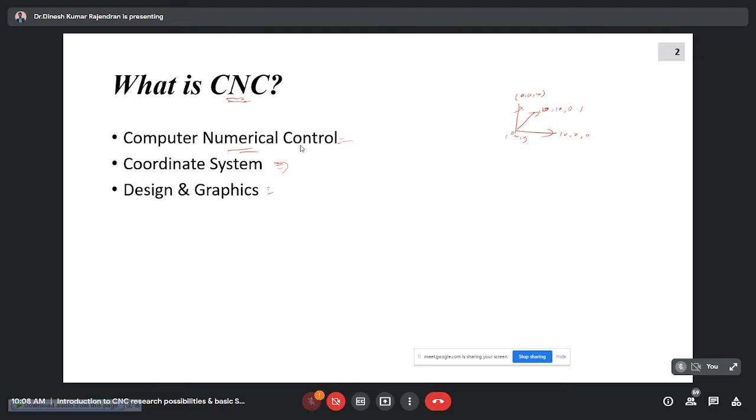So starting with this, I'll start with the basic machining, like whatever we have. The afternoon session, those who are attending, you might be knowing some of the few coding processes, how to utilize the machine, how to check with the process, that would be given. But what are the machines we have?

This is all about the machining center, like except surface finishing or surface roughness - surface finishing you can do n number of processes. Either it is going to be cutting, either it is going to be drilling, or it is going to be probing, or it is going to be milling. Whatever the process, it can be done completely with this particular thing.

And apart from this particular machine, what will be the output from that particular session is what are the other research possibilities using CNC, like computer numerical. If you are knowing basic programming in CNC, where you can apply it, what are the themes you can apply it for, that we'll be discussing in this.

So of course you have plenty of opportunity in machining. Of course when you come to forming, and when you come to welding, of course you have. When you come to additive manufacturing, of course you have lot, because everything is controlled by the coordinate system. And other possibilities, what are the other possibilities which is completely controlled by your computer implementer. If you know what is the coordinate system and what is the coding which is being used, you can control the entire thing with this CNC basic machining operation.

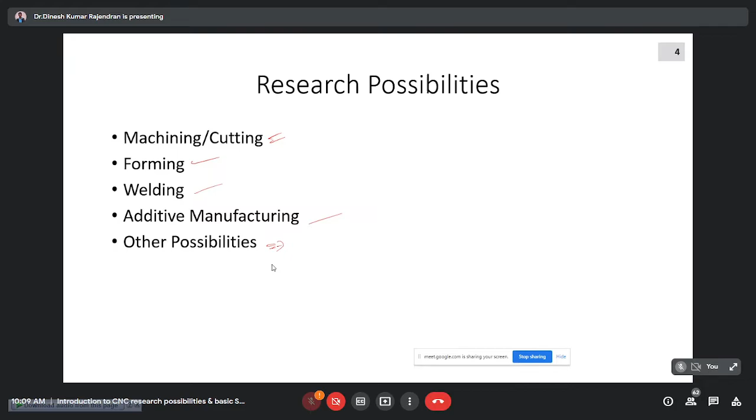That's what we'll be - some noise is coming in the background, right? So machining or cutting.

First, of course, we start with turning. So when we take basic turning operation, you have a shaft or something which can be done, so that can go for a facing operation, that can go for a turning operation. And what is the research possibility in this?

Now micro machining has evolved into a serious process, micro machining of intricate shapes. So whatever you do, as Noor sir was handling some session in yesterday's session, he was speaking about micro machining, completely removal of small chips. It is like removal of layer by layer in the micro level. So that has a wide scope right now in the field of turning when you go for micro machining.

So when you go for surgical equipments, it is mostly used in surgical equipments.

When you go for surgical equipment manufacturing, micro machining or micro turning plays a vital role in getting your product output done, and that area is a huge market because every surgical instrument or equipment has a sophisticated structure with micron-level accuracy. The cost of making that can go into thousands or even lakhs. So for those components, what you are going to learn in this CNC turning operation is going to have a vital impact.

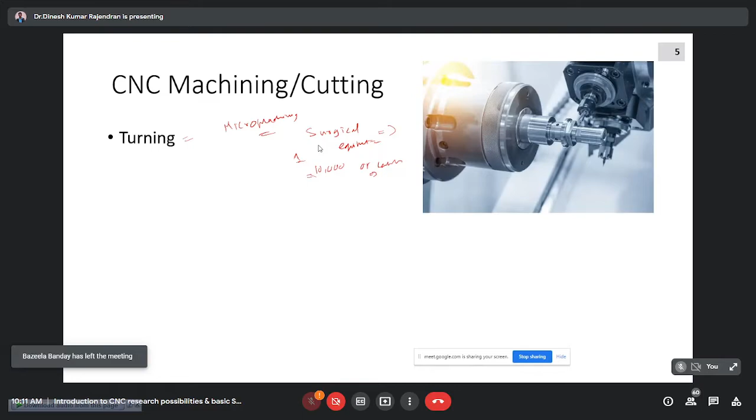So when you consider the entrepreneurial activity from this, apart from research, what are the things you can manufacture? If you know just the turning process, you can very well make something like this, or intricate shapes where the structure is completely allied, like what you have in wooden carvings, something like that. Everything can be done with this process.

So mostly when you go for the turning process, micro machining plays a vital role. Then comes the milling process. When you come to the basic milling process in CNC, the most intricate structure that will be tried by every expert in this machining center is making a bevel here. So they will have a structure like this.

Making these intricate shapes gives you complete clarity on milling operation, and once you know the exact milling operation, there is a lot of possibility in research where you always go for surface finishing of machine components, or you always go for manufacturing engine designs. Whatever engine design we have in aerospace, everything right now is completely milled and fabricated.

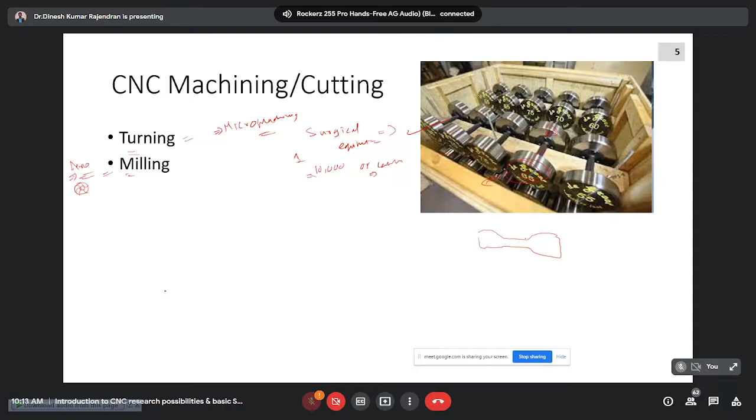You don't go for any welding or additive manufacturing, it's not even installed yet, they are still in research. So when you want to try out something on aerospace design, your milling knowledge, like the coding design based on your milling knowledge, is going to help you in those processes.

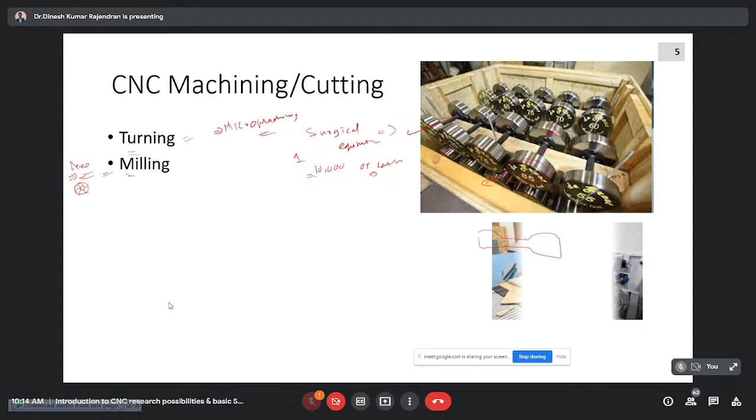So apart from that, the entrepreneurship thing you can try out with this is wood carving. What wood carving is happening is everything based on the milling operation, where you can see something on doors. Earlier carving was completely done by hand. Now it is completely based on CNC milling operation, where landscape generation is the beautiful task done with your milling operation.

Suppose you have some landscape where you have intricate mountains or something, these things can be completely done with this milling operation in a micro level way. When you go for the first layer of material removal, then you go for the micro tips, with that you create the intricate shapes of the landscape whichever is available.

And this is right now a hot topic of commercialization in the Valley, because when we met the director of MSME last week, he gave us a project on how to make the landscape of the valley, which can be sold out to the entire country or the globe. So in that case, this milling operation, when you have adequate knowledge in this, is going to have a better business opportunity in landscape manufacturing or the wood carving industry.

And what is going to be the research output of this? If you know milling and something on aerospace, the most vital thing in the milling operation is you can go for die designing. What are the die designs you go for in this area? This has a vital scope where a hardened material has to be designed, and that basic profile is completely manufactured by the milling process.

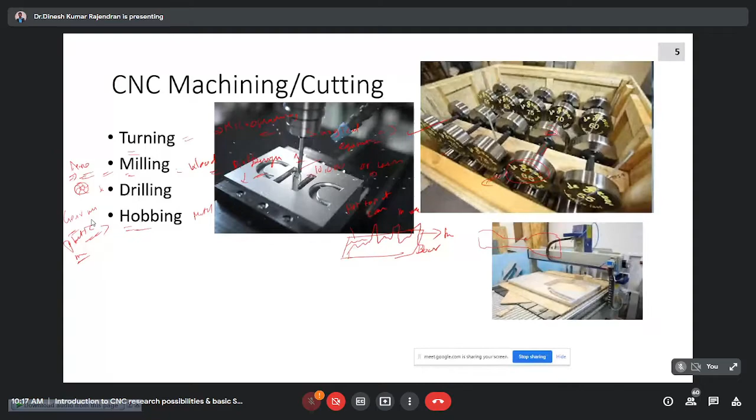If you know something about basic simulation, basic programming on CNC, how to go for a gear hobbing module - now we'll move on directly from machining to cutting.

Here it comes with different modules in laser cutting as well, where you have intricate profiles. What profiles you are getting engraved or carved is completely done with laser cutting. And what is the research possibility with this? Now sophisticated micro manufacturing needs a product maintained at an accuracy level of maybe around 5 to 10 microns.

Getting this product through machining is going to cost you thousands or lakhs. But when you go for laser cutting, the same operation can be easily done for a few thousand. So that is the major advantage when you go with laser cutting.

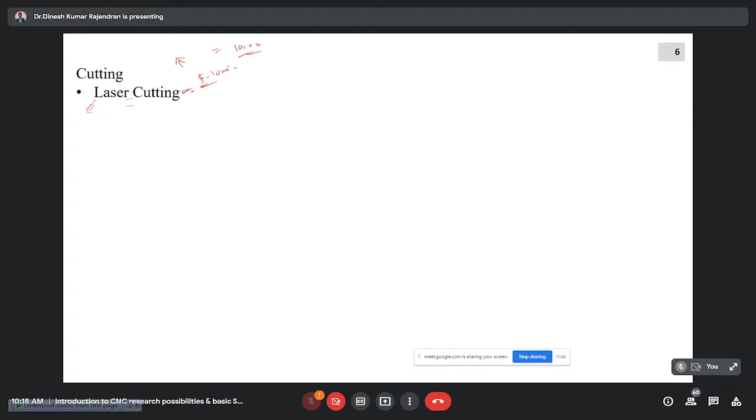And when you go for entrepreneurship activity with laser cutting, you have very good designs - this is completely made by laser cutting. They spark the laser at each and every point of the system and take the coordinates. This is completely 2D, and even 3D is possible with this. When you learn this CNC programming, the output can be this laser cutting or designing, which has huge scope in the market when you go for aesthetics.

Now you could imagine the engraving items, the embedded items you find in the market, or the shields or prizes you receive that are engraved or embossed on a shield - everything is based on laser cutting. So this technology has huge demand in the market.

I know a guy who started this business with just around 12 to 13 lakhs of investment, and he was an ME graduate from a reputed college. He got involved in this process and was doing some project with it. Then he started ideating with the process and collecting data. He started constructing his own machine and started a startup for shield printing.

Whatever shape you give - either our college logo or your name has to be embedded - everything can be completely laser cut, and you will get it. If it is going to be in metal, you have to go for laser to get a better profile, or in glass you also have to go for laser.

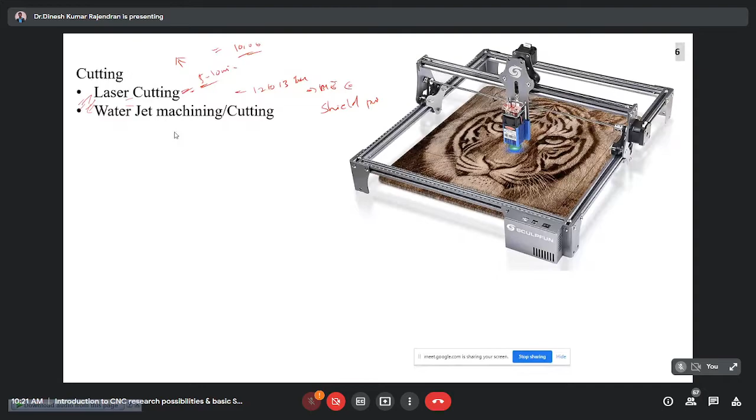Then comes water jet machining or cutting. Of course you would have read something about this in non-traditional machining processes, but what is the actual application? When you have some brittle material, ceramics, or composite that has to be machined, you cannot go for milling or laser cutting, which will not give you the proper output. In that condition, water jet machining, which uses abrasive slurry based on the profile structure, surface finish, or intricate structure, lets you play with the abrasive slurries. If it's in micro level, you get a better surface finish. If it's in macro level, maybe 100 microns rather than 5 or 10 microns, the profile is going to be quite higher. So there's a lot of scope in this cutting operation.

Then comes EDM. Again, wire EDM process or EDM process profiles intricate shapes just by moving, which trends with CNC milling operations, CNC simulators, where you create the profile, and then the machine will touch, spark it and move on, continuously sparking over it. The electrical energy is converted into heat energy, creating an intricate profile, completely based on your basic CNC control, because the backend coding will be completely on CNC.

Without CNC programming you can... yeah.

Right, thank you. So all this intricate structure manufactured even in EDM goes on with your CNC process. Everything is controlled with just the basic coordinate system, or maybe around 10 to 20 G codes and M codes that you always keep in mind to understand these processes. EDM now is almost like a well-developed technology, but there are still many researchers working on electrical discharge machining or wire cut EDM technology that creates intricate profiles. For a sharp sheet or plate where you cannot directly go for machining, you can go for wire EDM process directly. That has to be understood with knowledge of the medium, because only then will you understand the design being applied and the coding being applied. These intricate structures are manufactured by wire EDM, where you cut and take a precise form not feasible with milling or gear hobbing process, because these are microstructures where you cannot have any other shape with such intricacy. In that condition, EDM technology becomes a replacement for micro machining processes.

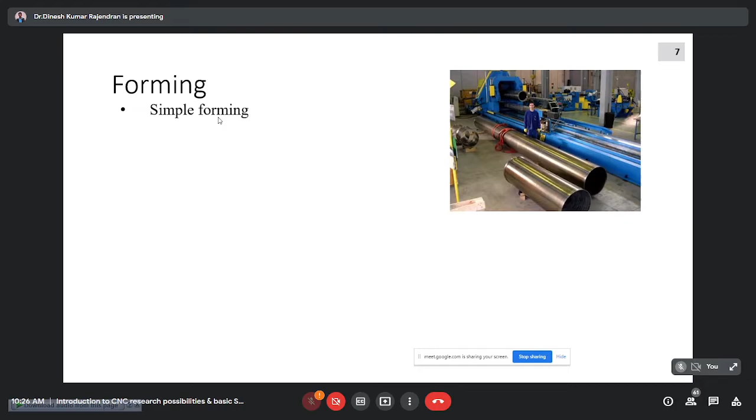In that condition, you have to go for an intricate shape of forming. The problem with forming small tubules is when it's for human implants, like something that has to be sent through your blood vessel. Those components are very minimal, very small in structure. That micro level has to be formed precisely. So this simple forming operation has a huge scope in surgeries or medical devices, where each and every intricate forming has to be done. This is mostly used in that particular sequence.

Then it is going to be incremental sheet metal forming. So next session will be completely on this. He'll be explaining a complete set of what is incremental sheet metal forming, and what is the advantage of this incremental sheet metal forming.

How this CNC is used is, when you have a sheet, it forms layer by layer. It pushes, and a gradual pressure is applied to get the intricate shape, so that you don't have any impact of load that creates a crack, or any excessive forming in a particular area that weakens it.

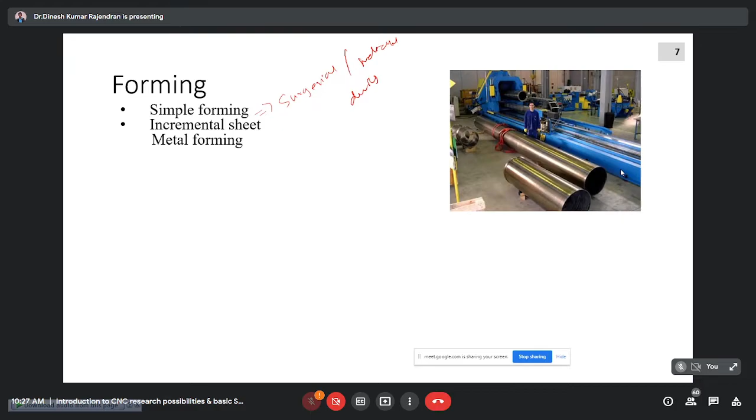So what is the major advantage of this incremental sheet metal forming or simple forming? As you see here, the intricate shapes are completely formed. When you go for normal forming, the problem is with the edges - due to the maximum force applied, the maximum strain and stress created makes these joints very weak. In that condition, to get the complete module to be perfect, you go for incremental sheet metal forming.

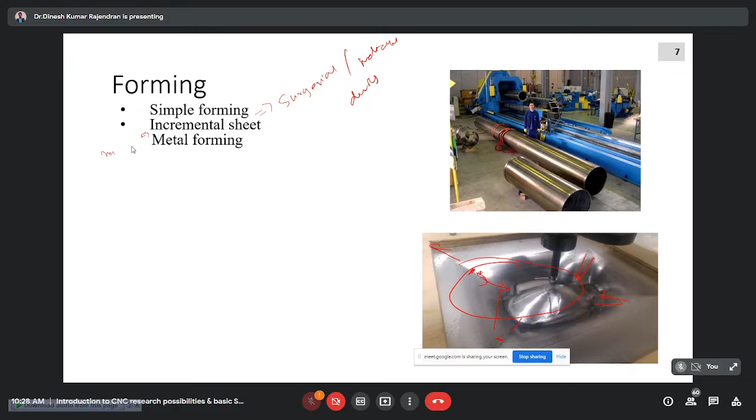This incremental sheet metal forming has a wide scope of research, where people are still working to get it right, because the complexity increases with this. There is a lot of research going on this particular incremental sheet metal forming, which you will see in the next session. So here are some examples of this sheet metal forming, showing how it actually works.

You have a normal space, and with this sheet metal forming, you create the entire profile of your body. That's how this is generated. So again, this has a wide scope of research.

Then the final thing in forming will be completely on superplastic forming. Have you ever heard about superplastic forming? Superplastic forming is the one which gives you a 100 times increase in area, 1 to 100 times. Incremental sheet metal forming can give an area stretch of around 10 to 20, maybe around 40 times. But superplastic forming gives you an intricate shape that can be around 100 times. So the surface area, without any defect or loss in strength, can be stretched to 100 times.

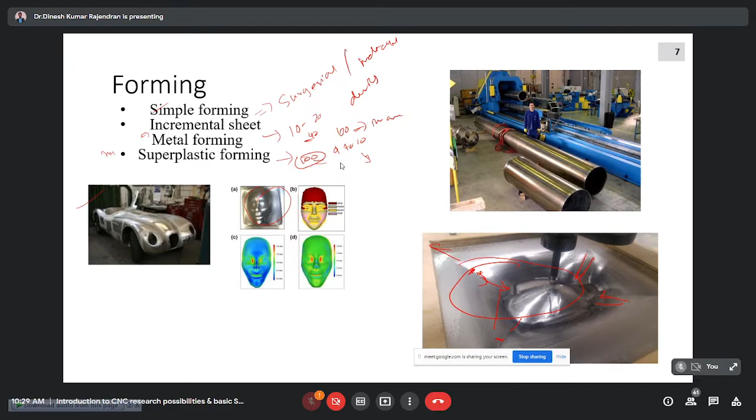Maybe like 1 centimeter can be stretched into 100 centimeters without having any loss in strength. This is mostly used in aerospace, because they need light material while maintaining strength. In superplastic forming, things get stretched to an intricate state where the complete structure is stretched with the same level, the same uniform thickness, into a complete shape where the strength is maintained throughout the process. This gives a wide scope, and it's still in research.

You cannot find too many research works in superplastic forming because we don't have that much facility in most places, but still a few NITs and IITs have superplastic forming technology where this is completely a research topic. There is very little entrepreneurship activity in this area.

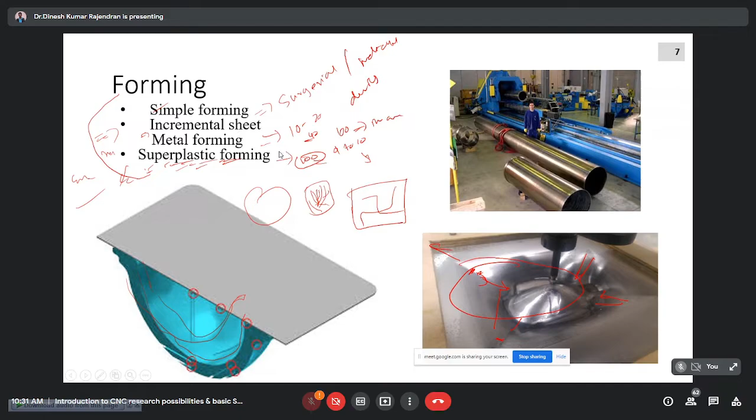When you go for metal forming, if you go to a temple or somewhere, you will get some shapes like sheet metal carved or engraved, forming images, idols, or something like a checker pattern, whatever you have. All of these are done through this process. So these are the research as well as entrepreneurship ideas that you can generate from the forming process.

Next, moving on to, of course, my area, which is welding, and this has a huge scope.

When you go for welding, how can CNC be actually interlinked with these processes? Of course, robotic welding. When you go for robotic welding, you have two sessions: one is completely continuous welding, and one is spot welding. When it is continuous welding, it is completely robotic arc welding process. What are the advantages of this robotic arc welding process?

When you have something to be welded like this, there should normally be a worker who goes there and does the welding process, the rimming, cleaning, everything. For an intricate shape where you cannot put your hands inside, or it's hard to reach, that is completely replaced with robotic arc welding process.

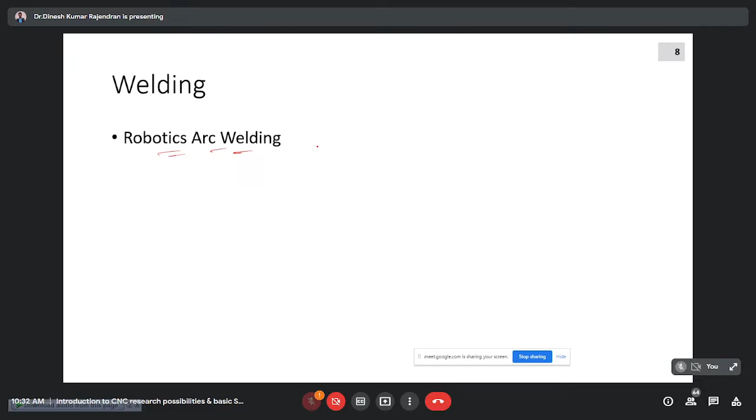That robotic arm is completely controlled by your CNC controller, which is the back end. You have to position it, like it has to move this much in the X coordinate, this much in the Y coordinate, step over here and start welding. Then it has to turn around in the Z axis, rotate in Z axis, and go for underarm welding, depending on how the welding has to be done. So this CNC technology has a wide scope in robotic arc welding, where the whole arc welding of the robot is automated by your CNC controller.

So even for doing something with this, you should know the basic CNC, the basic CNC programming to start with this welding process. There is an XY system, and there are two systems used here, Fanuc coding and Siemens coding. Both are quite different, using different technologies. So to start with this, you should know the basics of CNC simulation and coding, which has to be given completely over the process.

Then, of course, spot welding. The necessity for knowing spot welding is that you should know the complete coordinates of a car, where each and every spot has to be made.

When you go to companies like Maruti or Hyundai, where they are completely automated with spot welding, you have a minimum of 10,000, maybe 10,000 to 50,000 spot welds in a complete car manufacturing, where you could see spots here, here, here, here, all over.

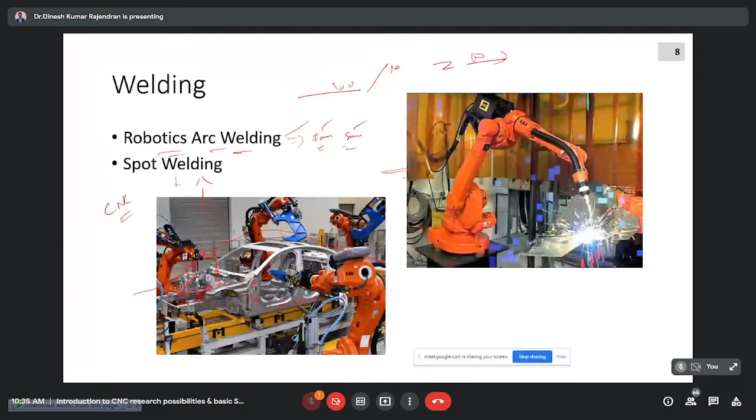Now, my own research topic: friction stir welding. My guide, when taking class a couple of days ago, said he'd explain it, so it's my responsibility to explain how this CNC is actually used in this process, because friction stir welding machines are mostly 4-axis, though now we have 5-axis as well. This 5-axis machine has X, Y, Z, and a rotation which is the fourth axis, and this side can be rotated, which is the fifth axis. That's how this 5-axis CNC machine is completely used for the FSW process.

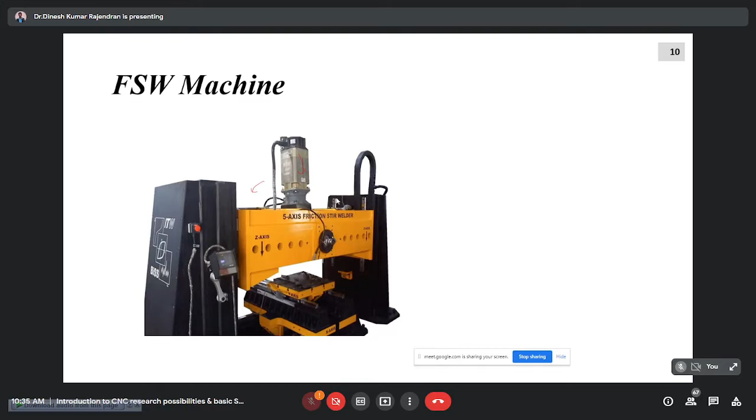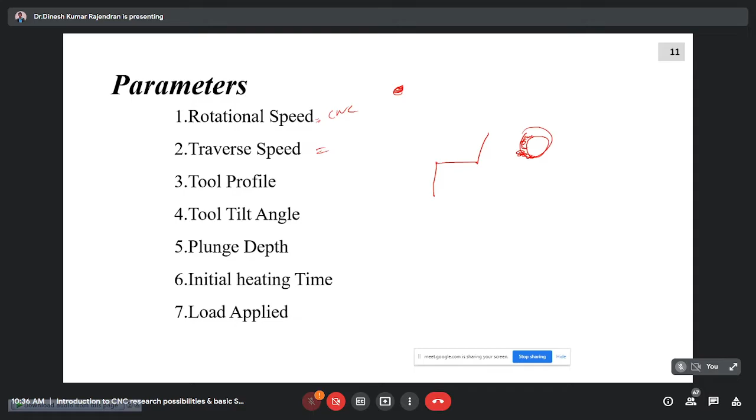FSW machines are again used for welding, and mostly, this is where I was doing my project in ISRO, for their complete setup of cryogenic fuel tanks. There are different parameters where this rotation speed is controlled by CNC - what the rotation should be, the traverse speed, how much it should travel in X, Y, Z. Suppose there are two welding sectors - how this has to be welded, how much it has to travel in X, Y, Z, tool profile, tilt angle, and other things. So everything except this has the control of CNC.

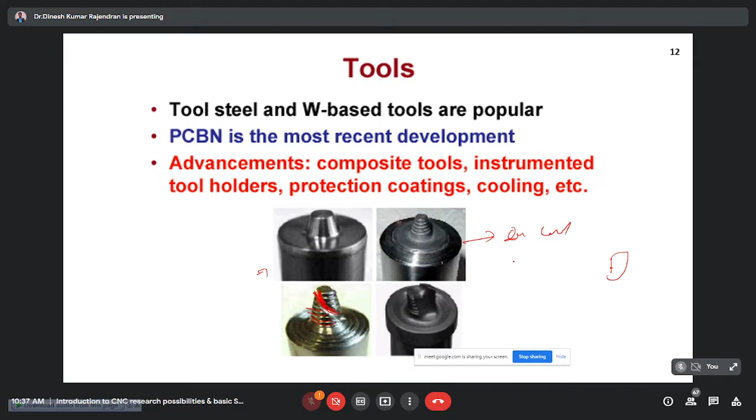This intricate profile has to first go through turning, then this has to go through milling, or go through this hobbing process, with just small changes. So to understand this, to get this, a direct conversion of design to coding should be known. Only with that can you create this design. Even if you create a CAD design, you should know how to control the machine to run with it. So for that as well, you need to know this.

And this is what my project is all about. I was working on this cryogenic fuel tank welding, where the other welding processes were not giving more than 40 to 50% efficiency. We were able to get around 80 to 90% because this process has the intrinsic property where the material property remains stagnant from minus 250 to plus 260.

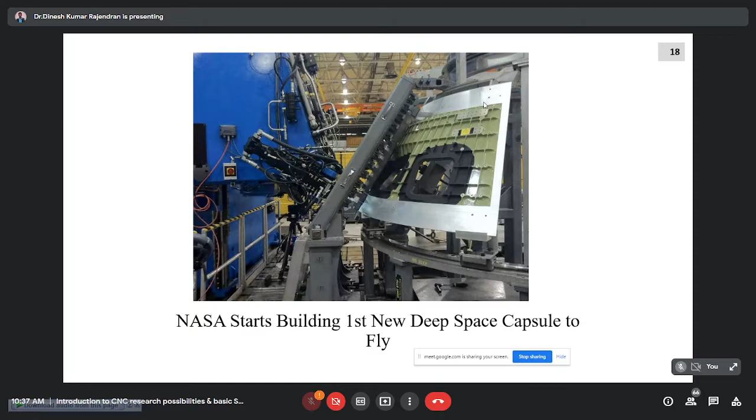So these are the various applications of this particular welding process - mostly aerospace, because there the weld should be more similar to the parent material and cannot have any heat effect. So this welding technology is mostly applied there, and also in marine. And you also have friction spot welding, where now the spot welding technology is completely replaced with friction stir spot welding.

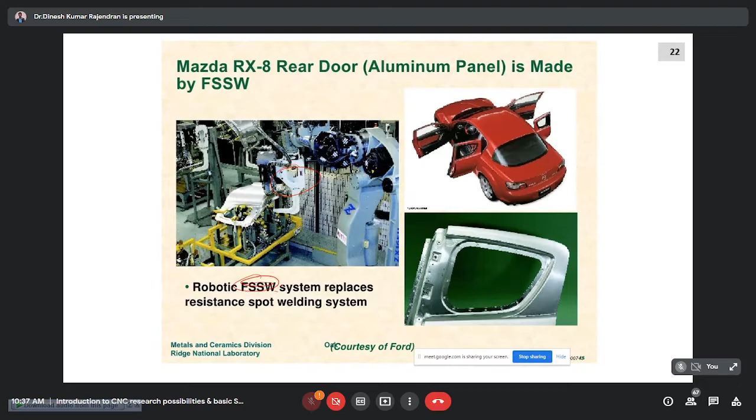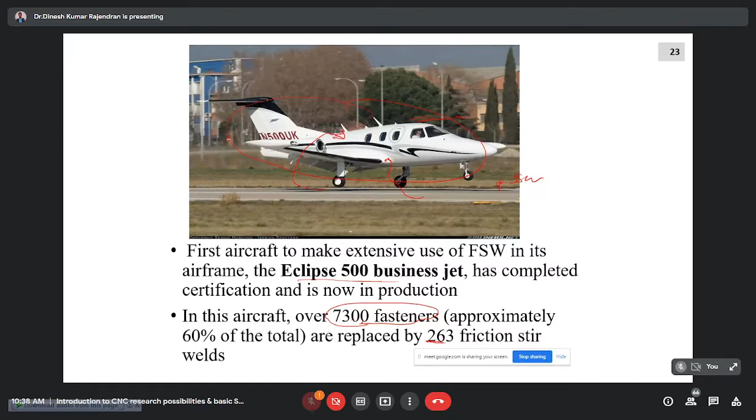Whatever the coordinate system, you need to know these things as well. This is a complete assembly made with friction stir welding, where around 7,300 fasteners were approximately replaced by just 263 friction stir welds. The fasteners that were completely used in this Eclipse 500 business jet were completely replaced using this particular technology. Again, for this, you may not know how the machine should move and do the weld - you need this CNC basic programming to understand all these processes.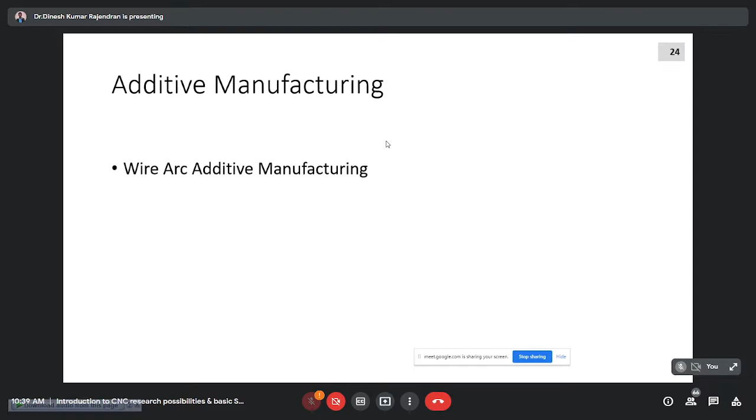Now comes the final topic before moving to the simulation part: additive manufacturing. From the welding side, I will take additive manufacturing as wire arc additive manufacturing, which is gaining wide scope right now. If you want to create a metal component and add to it, you don't want to fix it and weld it repeatedly. You just hold the component, do some wire arc additive manufacturing, and generate a component. If you want, you can just go for some machining over it.

So why this is actually used is, if you want an intricate structure like this, either it has to be welded or machined. But the problem is, when you have a thicker material that has to be welded with fins of smaller thickness, you go for welding. But the welding is again going to create a problem, because the thicker material will take too much heat input, while the thinner material will melt off. In that case, you don't have an option to go for welding, because it will create a weak portion. Or if you go for machining, that would be a stupid idea, because you may need a lot of time to machine it and get a final product like this.

So that is completely now replaced with the wire arc additive manufacturing process, because this gives the same distribution of material over the process. And this is completely based on computer numerical control, where each and every coordinate has to move, say from x 10 mm, then z 1 mm, then again x 10 mm, then z again. So it has to go layer by layer, layer by layer. Your coding should be such that it creates the process from bottom to top in a complete way. That is where additive manufacturing technology completely uses this.

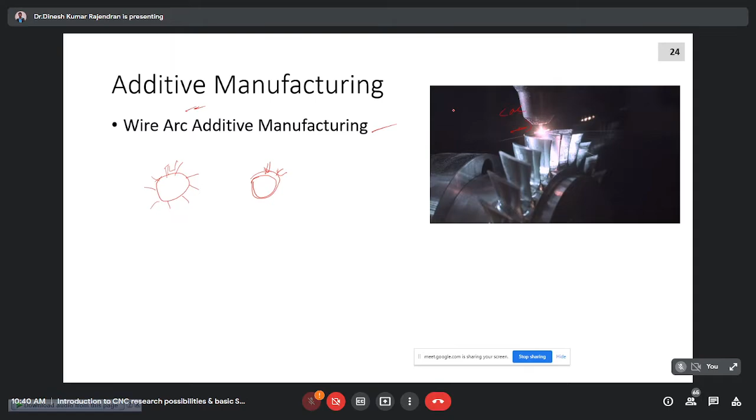And of course, other additive or 3D printing technologies build these intricate shapes completely with this process. Even a small CNC 3D printing machine using fused deposition modeling can build up small components into a bigger component with an intricate shape, or metal printed 3D manufacturing, or even organ printing. Everything is based on your coordinate system, where you generate a CAD model. From that, you create a path profile, which has a coding section at the back end.

So if you want to play with the structure, you don't want to change the design after exporting it to the machine. What you actually have to do is, since the machine understands the coding language, you can just retrieve the machine data. This simplifies your design effort, because if you want a small projection, that's fine, but when you want a small change, redesigning it would still be complicated since you'd have to completely change it.

Instead, once you have the complete code generated for this profile, you know it involves clockwise or counterclockwise rotation, moving downward, then anticlockwise movement and moving upward. This coding can easily be loaded into the machine, which then understands it's not the actual design being extracted. The small changes that would otherwise be complex with the design, requiring you to completely redesign and re-export it, can instead be handled directly. Once your design is converted into complete coding, and you understand the coding process, you can generate these small design changes into the actual setup and get your product output done.

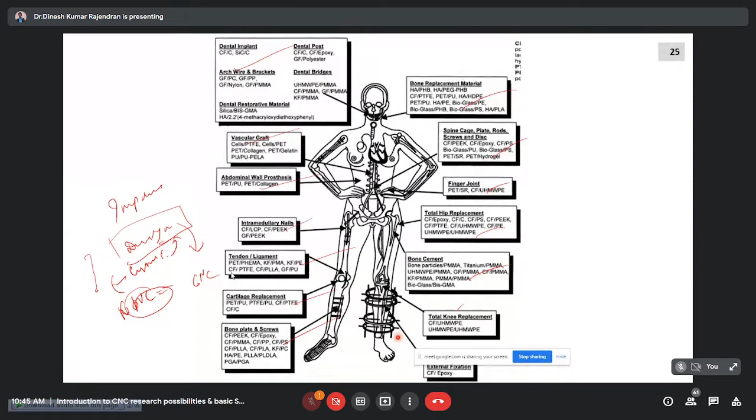And the possibility you have in this research, the basic thing will be understanding of CNC coding. So without CNC coding or the cloud point, you cannot go for any additive manufacturing, especially in bioprinting applications. Of course, in aerospace also you have a lot of things with this.

One second. Tabish, I'm in class, I'll call you back.

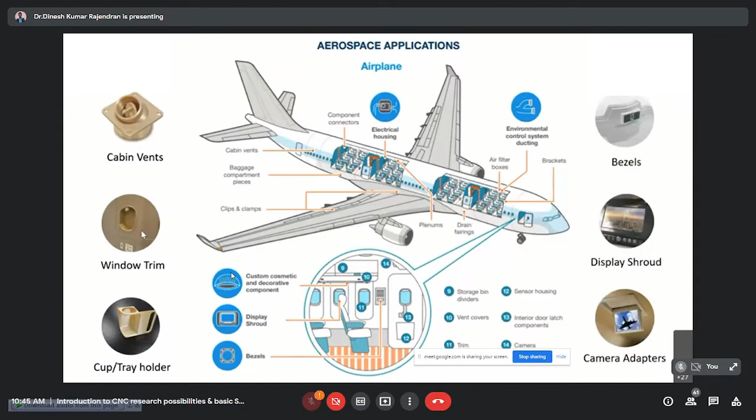So this has a wide scope in aerospace, and the GTRE engine is the latest thing being done with this completely additive manufacturing technique.

As my area of research is completely on additive manufacturing, there is a lot of scope here - just with CNC knowledge in FDM based machining, the technology has completely brought costs down. With a CNC machine it took around 30, 30 lakh rupees, but by applying the knowledge of CNC in the 3D printing process, where fused deposition modeling is only one-third of that, too within 6 weeks.

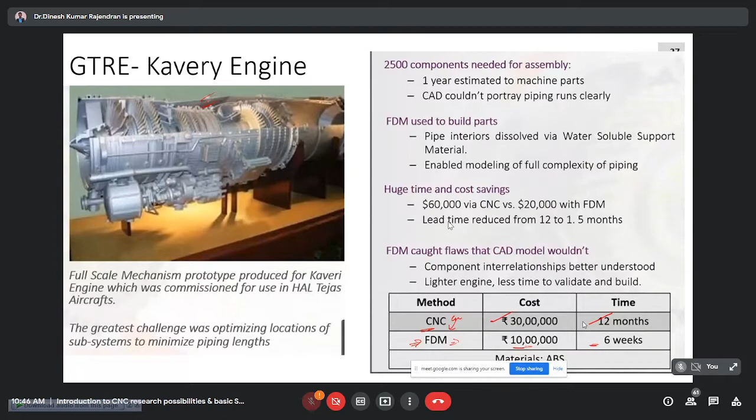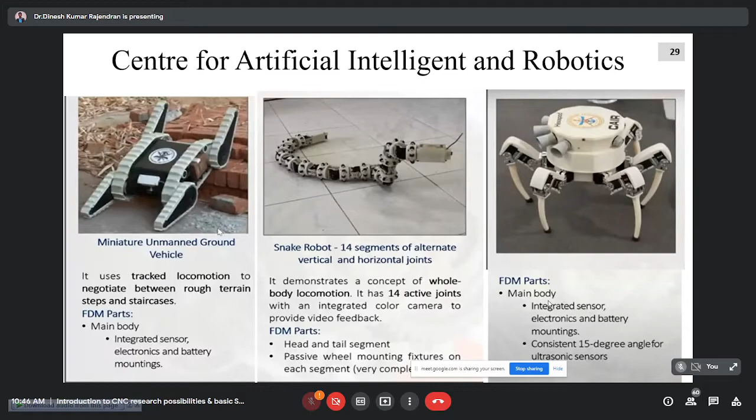So this is how the knowledge of CNC can be applied in different manufacturing processes to optimize it, to make it smarter, and get your product ready in the market. And these are the things I have collected from local sources, where this CNC technology is actually used for 3D printing of stuff.

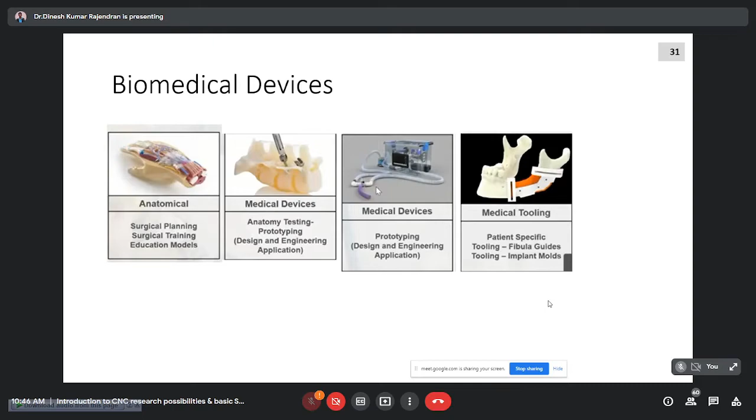And of course, in biomedical you have a lot of scope in your research area, where all the prosthetics or implants are completely made with the 3D printing process. And for all this 3D printing process, more than design, you should know the basic knowledge of CNC as well, to change the structure or customize it into a particular product.

So this is what is happening - you take the data, then that will be stored, like you scan the data and that will be processed, and that will be completely converted into a model, and that model will go for printing. So in that case, this also has a vital scope.

There are too many things, I don't have much time right now to explain about this - there are too many. Architectural and engineering again has this intricate step - whatever you do, you cannot just do the design. Suppose there should be some change in a particular area of the design - again, understanding CNC will easily let you change this loop from straight to cross. So that is the beauty of knowing CNC.

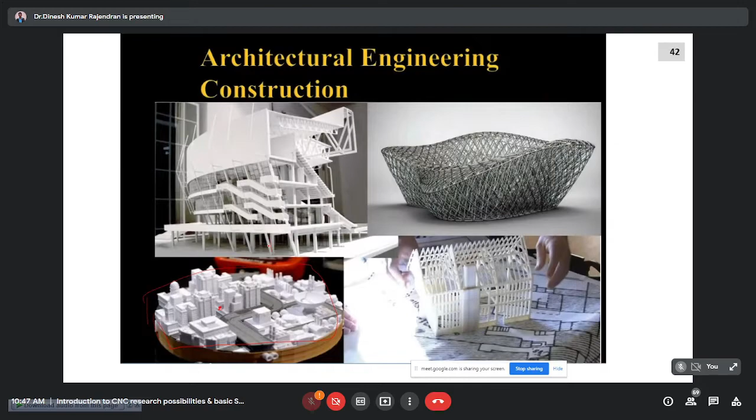And now this CNC technology has been completely applied in 3D printing for cement-like construction also, only with your X, Y and Z axis. Just by the control of X, Y and Z axis, controlling what material has to be flown, and the complete thing.

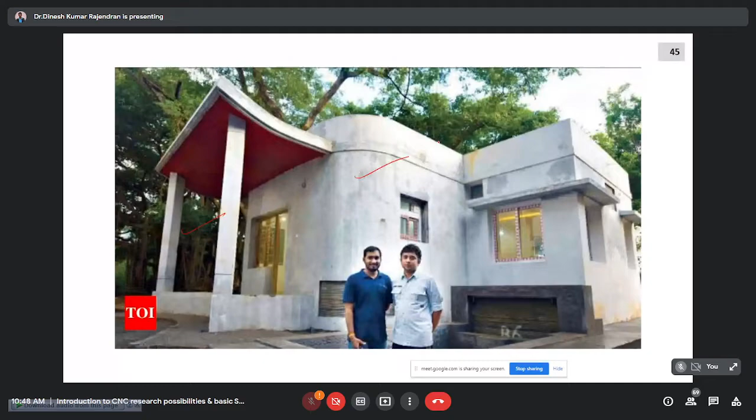This research is now going on in IIT Guwahati, where this research has now been made into a complete product in IIT Madras. There is a startup based on this cement-based, concrete-based 3D printing technology that gives you complete support for this. So these are the different aspects of what you can get out of this.

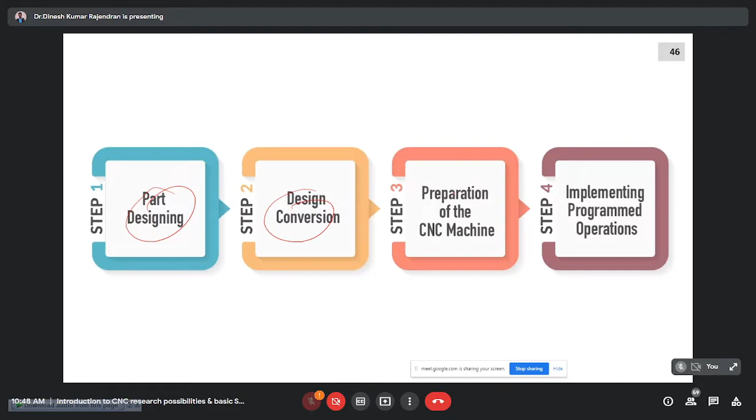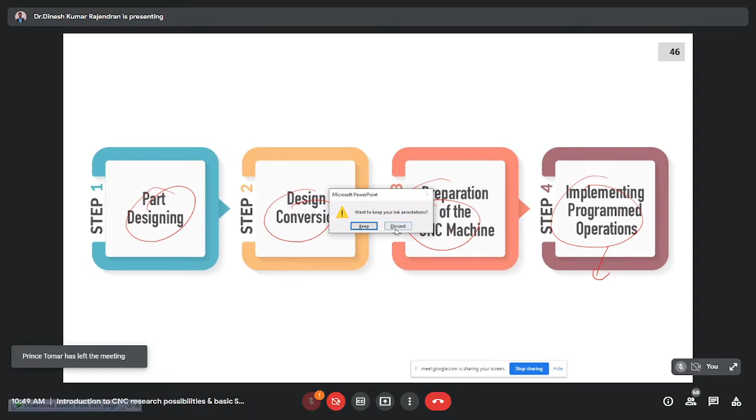Now coming to the simulation part. First will be your part design, second will be your design conversion, then preparation of the CNC machine, then implementing programmed operations. So in this part you can see the coding running in the machine only. I'll take the next 10 minutes to give a basic knowledge about what you have in CNC simulation. This software is paid actually.

You can always get the trial version. You can go for this CNC Simulator Pro, this is the software name that I use for this. There are too many modules, like you can check what you have in your G code, X axis, Z axis movement, or M code, whatever is to be done. So everything from your normal turning process to high level drone technology, everything is available.

Once you understand the basic machine process, you can use this particular software to simulate and check whether it is working or not. So I'll simulate a few processes for you. This is the basic thing I got from the software to teach you what the normal facing or turning process is.

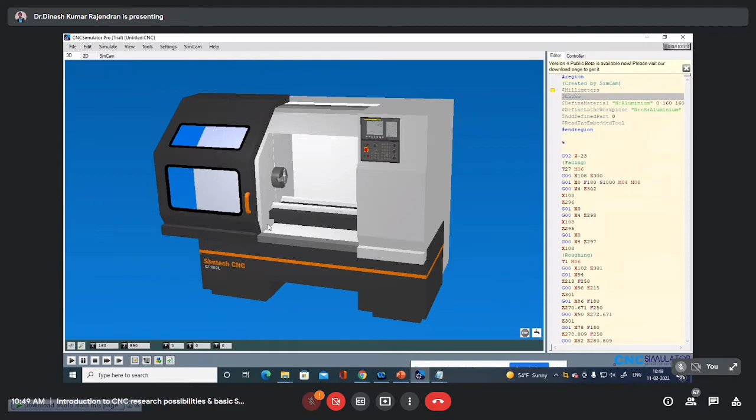So you have an embedded workpiece and you have the machine center which is being operated, and this is the normal facing operation, the facing cycle which is done with this. I think you could see this normal facing operation being done.

If you see this, G0 is the end position, where G01 is the linear movement, where X is moving at a rate of around 94, and then it starts with the Z axis around 213. So this normal cutting, whatever is happening, everything is based on coding. Here you could see the operation, here you could see the movement of the coding. So these are the basic things that can be done with your turning cycle, or turning center, whatever you have.

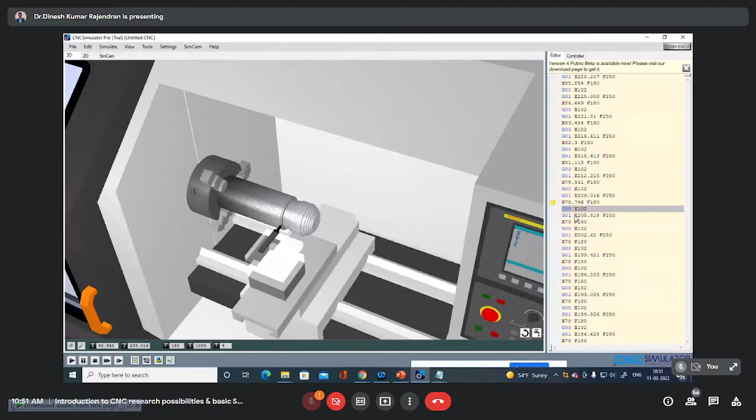And then when you go for grooving as well, or intricate parts, everything needs the knowledge of coding. This can be simulated completely with this software to check whether it is going right or wrong. Even if you make any error, the software will tell you what mistakes you are making. And I'll stop with this because I'll go to the next operation, stop this, and load one more machine. In turning, you have too many turning centers.

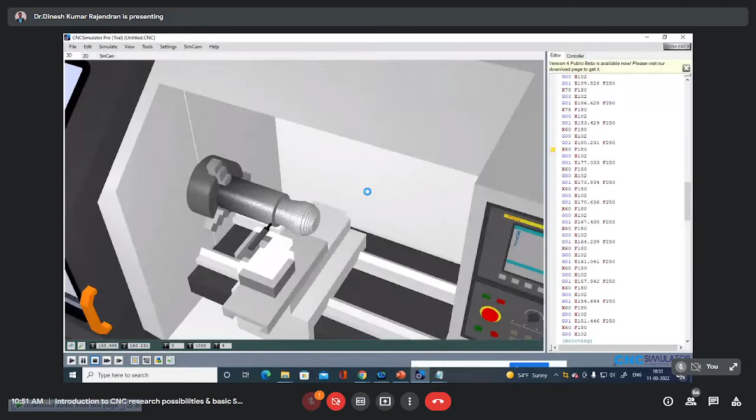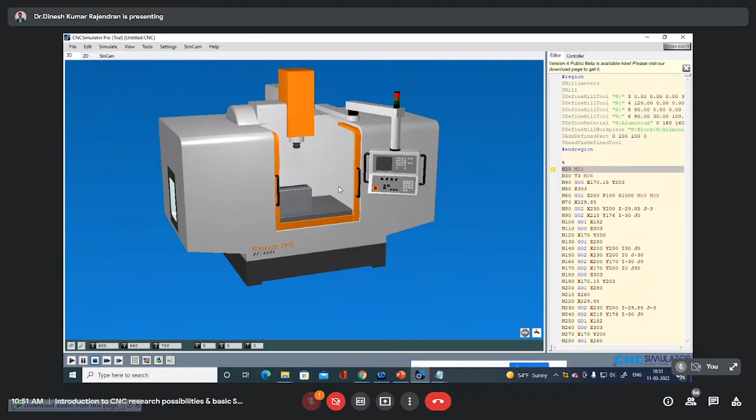I'll go for milling, and this is the milling center we use, the Simtech. I've got some coding with that. So when I simulate this, you could see the basic operation that is happening with this.

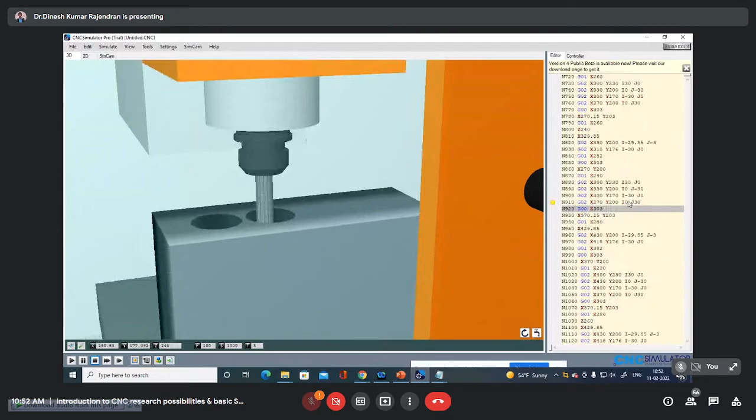I'm just getting some intricate profile with the milling operation, and you can understand the coding very easily. You need not worry about so much coding for this. This is completely like a loop, the same thing with some increment, maybe Z with a 5 increment, and you have the rest of the things. So that can be completely done with it, and even some intricate profiles are also possible with this.

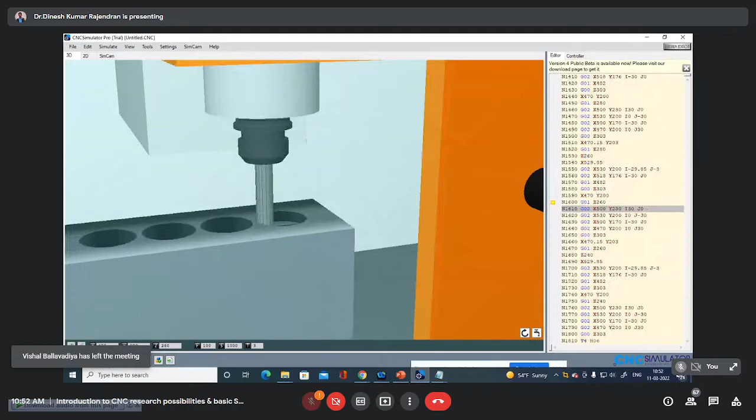So this is the basic simulation with your milling, showing what coding you have. You can just try the software yourself. Only thing is, this is a trial version, so you may not have much available. But with this, I got something to show the final output. And the next thing will be to stop the simulation. Okay, I've stopped it.

Sir, one doubt - when we are machining, when we are giving the code, will it show the time also, sir? Yes, here you have that. We always work for time control, as Sajid sir was saying, that's like the live simulation, because they have CAM packages and everything, which cost around 15 to 20 lakhs for each and every software. So that's what I've given in my topic - it is completely on the basics.

So suppose if it gives the time also, does it correctly match the time for the machining as well? No ma'am, let me tell you the practical difficulty in it.

There will be around 5% error because there is no friction in the simulated software, it will just move like that and move on. But if your machine is not in perfect condition, maybe the lubrication is not proper, or some fixing is not proper, in that condition it may get stuck.

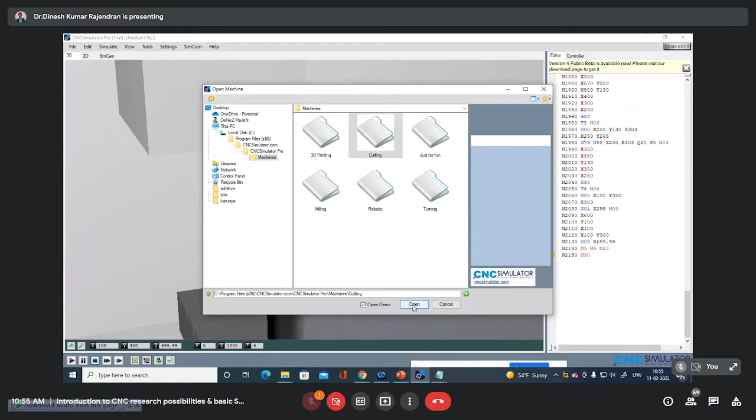Then coming to turning and milling, I'll show you something on cutting. I'll show you laser, plasma, deep hole - you would have seen this water jet that I was talking about. Let me show you something on this. This software is very useful for your basic understanding of how CNC actually controls everything, because you can play with the code and see what is happening.

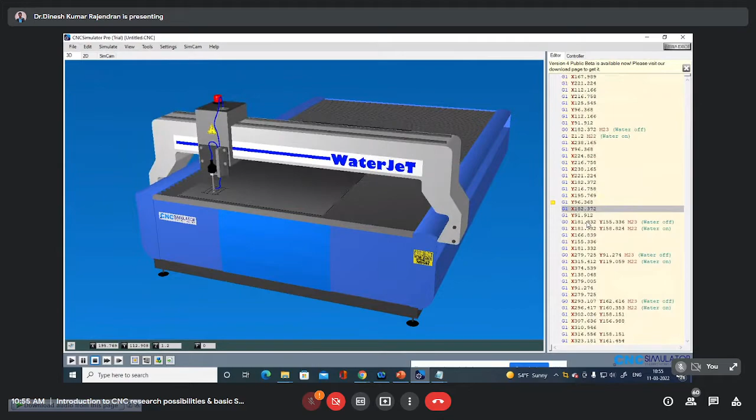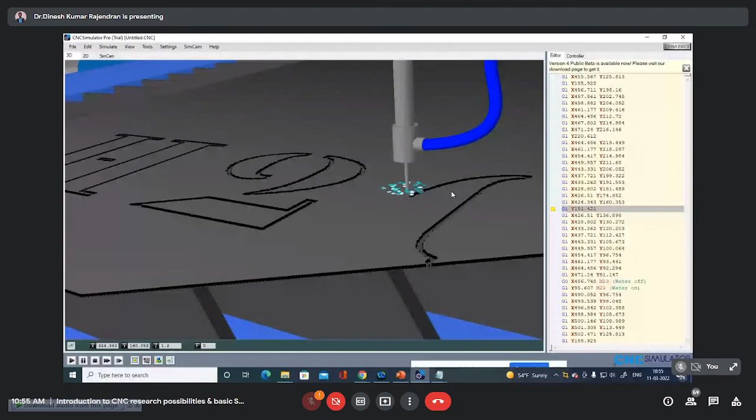Here water is on and off, because there is a lot of slurry being applied, which should not create any mark over here. So you can see how this complete water jet is being used. Here there was a water off, so nothing was happening. Now the water is getting started, then the water is getting off again, and it moves on. This is how it's used.

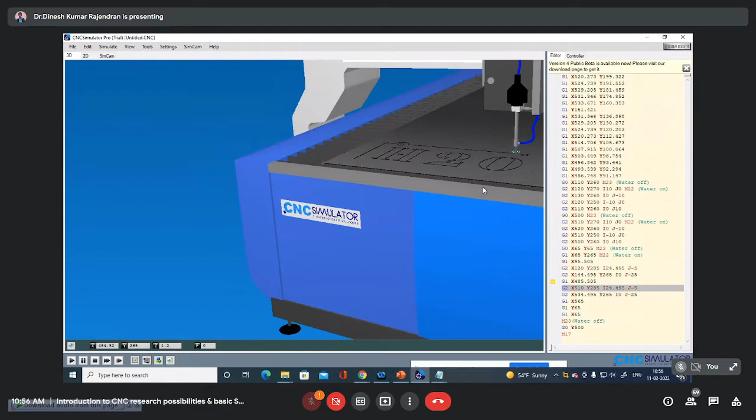If you understand the basics of coding, there are too many operations where you have a lot of scope in your research. This software will help you understand, before going to the process, what is going to be the actual output. One thing I can suggest, though it shouldn't really be suggested - if you have a mail ID, you can get a trial version over time, that's how we work on this.

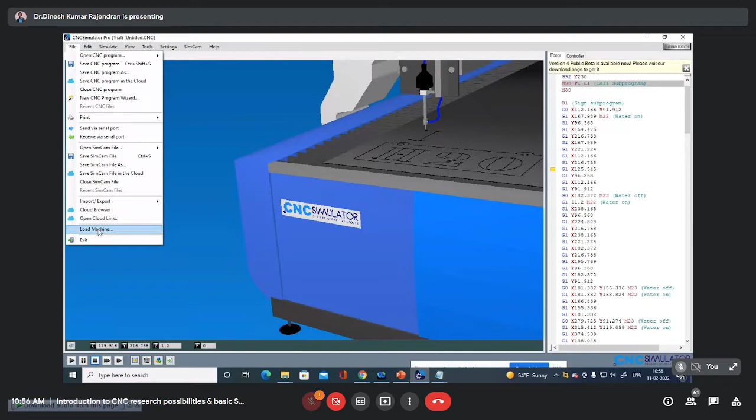This is SimBot Robo. Again, this is a basic module which is completely used in welding, material handling, or pick and place robots, or in industries where capture and movement is done. If you work on logistics or welding automation, this complete thing can be used.

Again, this is something to understand the basics, it's just for beginners. Once you are well versed with that, the CAM packages can give you the actual model of holding a welding torch, creating with a welding torch, or material removal, tool path generation - whatever advanced thing Sajan sir was doing, that was completely based on this. If you want to understand that completely, you should know the basic understanding first.

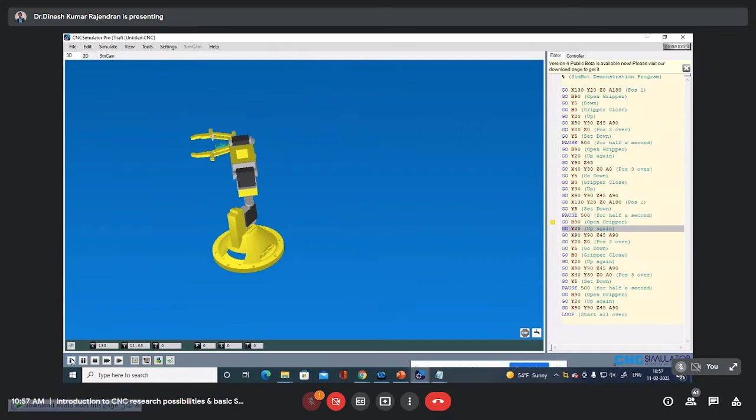This gives you the complete coding where each and every step - if you don't understand, you can stop here and see what is the process happening. And you can play it again. Okay, next this process is here, next process is this. Pause again, you'll see this portion going down. So you will understand each and every step in this particular software by using this.

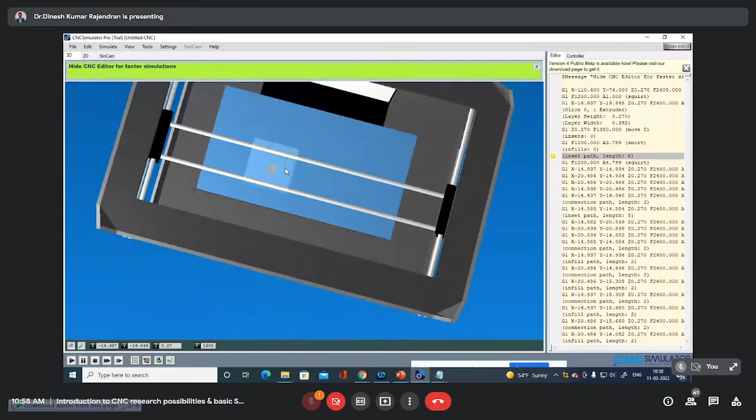And one more module you have in this is the 3D printing step. This is what's actually happening with this machine as well. When you project something, a lot of coding is generated, and that coding completely runs this machine. Whatever coding is used has the layer by layer printing of the material. You could see this layer by layer, material is getting added on, creating a layer of material.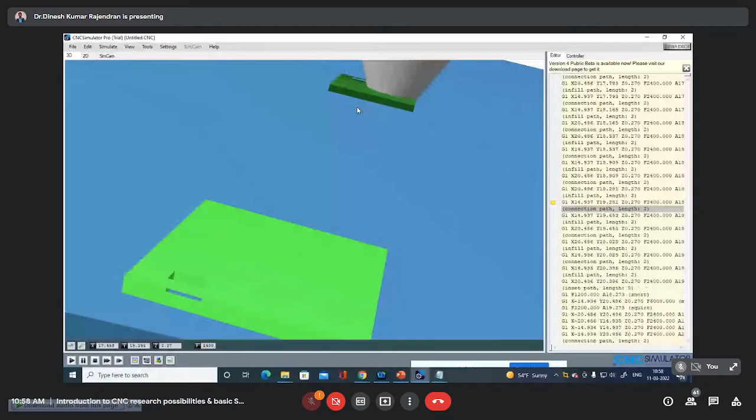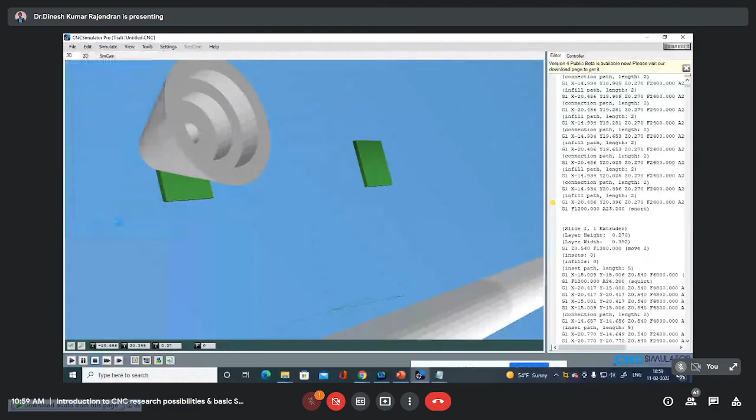Of course, if you think only this is what can be done, of course not. More than this, there is something called drone-based milling. When you have underwater drones, now underwater drones also exist. So when you go for repairing underwater things, like for underwater welding or machining, you don't want to go with the machine itself. You can just hold here, control with your drones, and check what is happening with this.

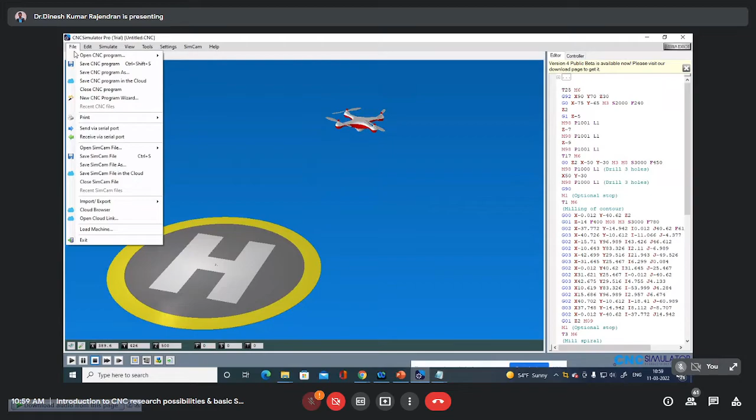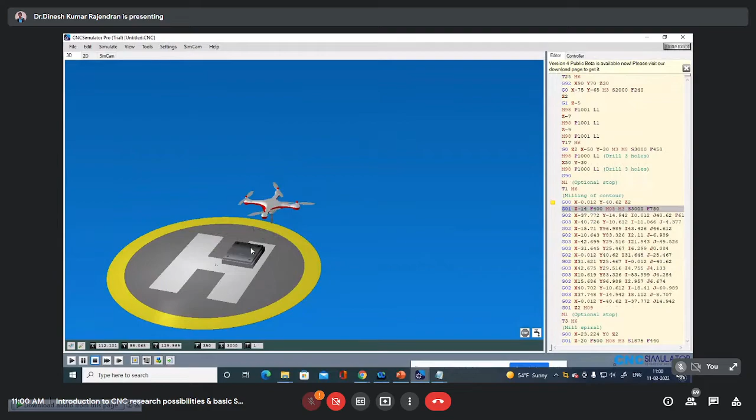This is the emerging technology right now, and underwater drones are actually available. So how to control that, how to include that in your machining operation? Of course, this is not going to be as easy as it looks simulated, because there will be a lot of thrust force or payload acting on it. So all this have different intricate shapes, but still with a simple drone you can completely automate your technology and see what is happening. This has a wide scope right now in the market.

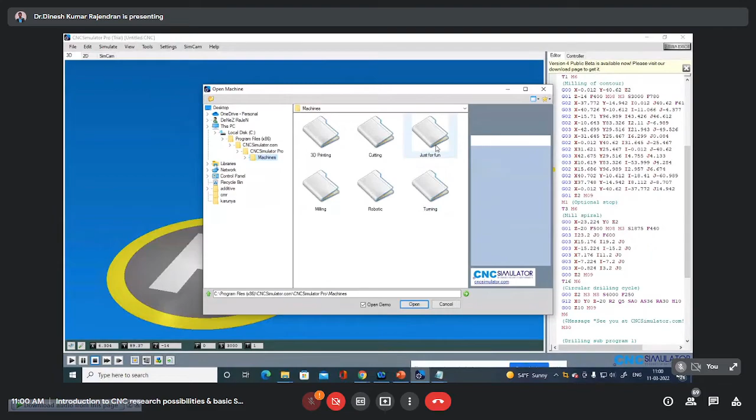And if someone is interested in gaming, I just want to show this to you. If you think only this is what can be done with this, of course not. Even a game, the movement of a car vehicle, can be done with this CNC coding.

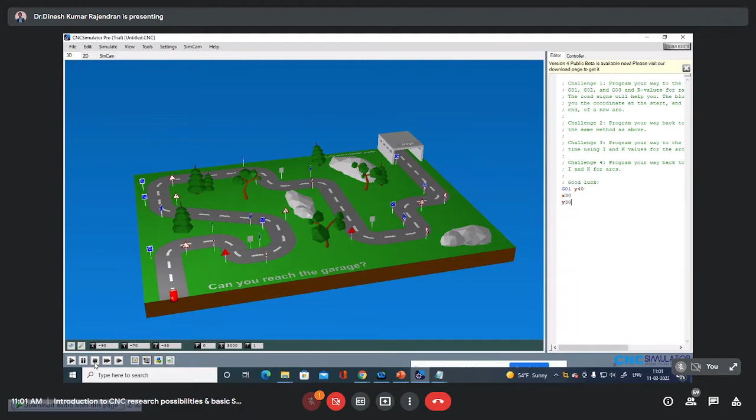Like when you start with this, I'm just saying, G0 G01, it is going to move on y-axis, y has to move 40, then x has to move 20. No, it will be again, maybe I'll keep 30, then again it has to take a turn on y, again 30. You try to simulate this. Now the car moved here, turned here, and stayed at 30. So everything is possible with this.

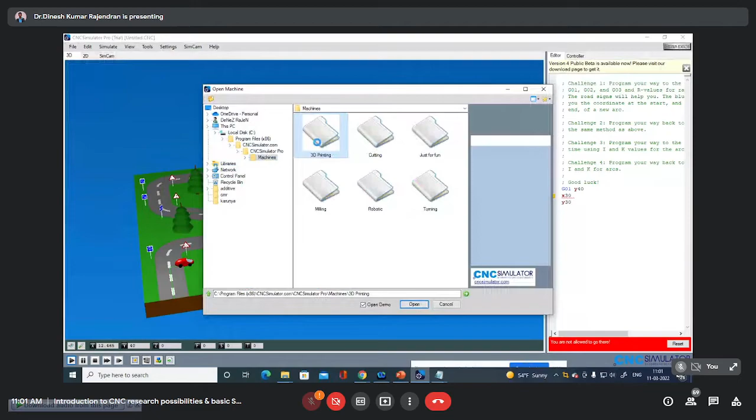When you go for this, the basic understanding you will get with this. I just showed you to give you an understanding of what this is. So this possibility is more with this particular machine. And when you start with this basic coding, you just want to know around 30-40 G code and M code, like what is linear interpolation, what is a probing cycle or facing cycle, how it has to move from x to y. That is all we want to know.

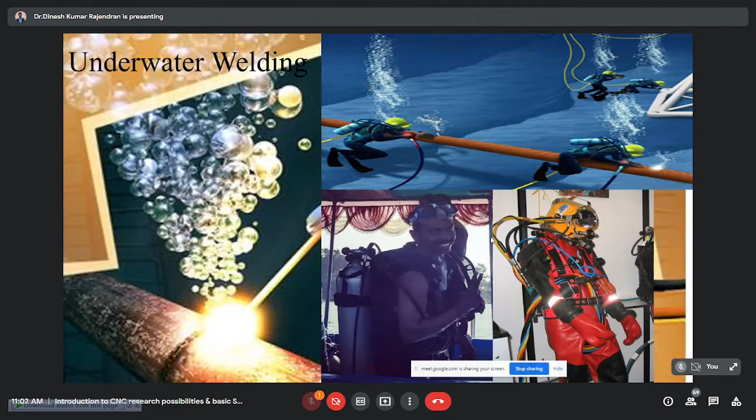Finally, concluding with this section, the major focus of our research, what I am working on right now, is we worked on some COVID projects for creating an automatic vending cum disposal machine. We have submitted one project on this and it is in process. I also work on underwater welding techniques, where I got certification in scuba diving as well. It was carried out in IIT Guwahati, completely on underwater arc welding, which doesn't exist in India right now, where there are only 1 or 2 training centers. This has huge scope for research.

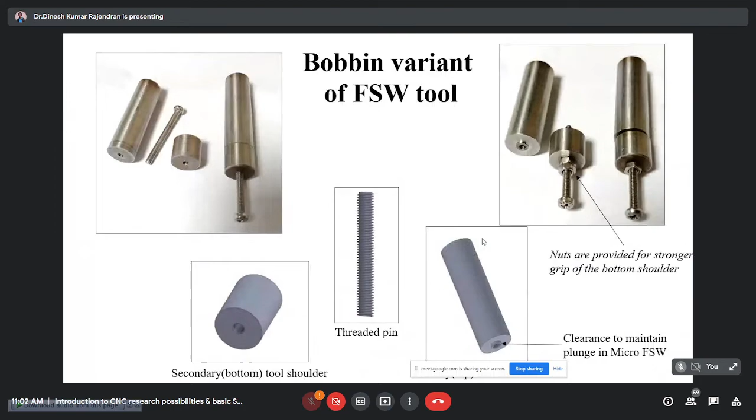If you want to start with that, you can always collaborate. We have something on newly developed tool, we have filed a patent on this as well. And of course, FSW we are using a lot. And this is what I've done in 3D printing. It was long back, most of my students might already know it.

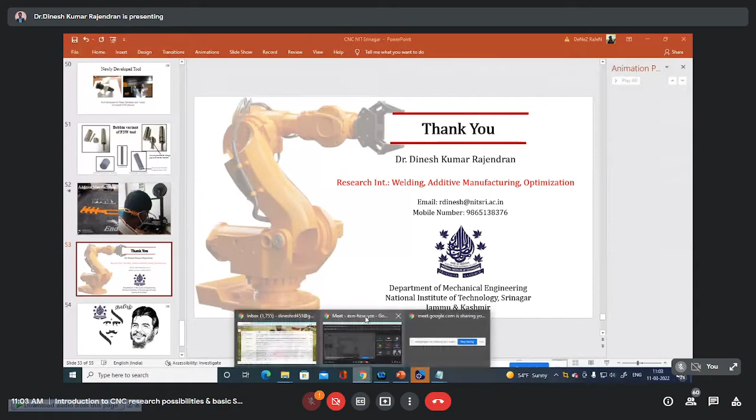Sir, what is the difference between arc welding and seam welding? Can you please elaborate on that?

Seam welding uses a roller, just like spot welding. It is a technology where you have a bottom portion and top portion which has electrical contact, and with that, heat is generated that moves on a roll.

Arc welding is what you have in MIG, TIG, plasma, everything that produces an arc. That is arc welding, everything is arc welding, and it is mostly used. Now we have tandem, hyperfill, all these are there.

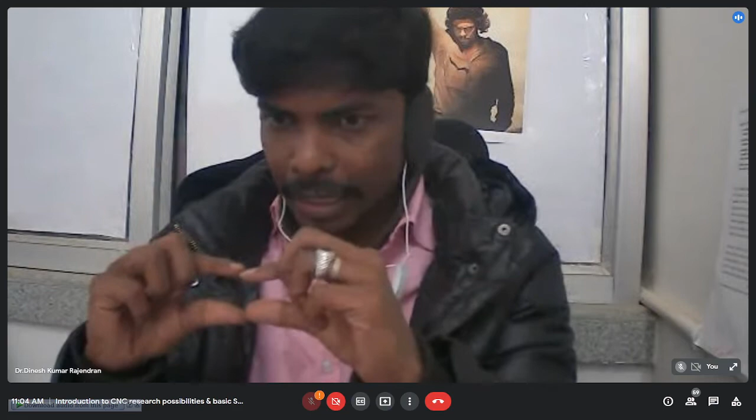Seam welding is when you just want to join two materials where there will be a roller, and there will be heat flow, meaning electricity flow at top and bottom, that will be rolled off, and due to the heat and pressure being applied, the welding will happen.

Arc welding ranges from normal manual to advanced robotic welding. Everything is arc welding. Any doubts?

Any other doubts? Sir? Yeah.